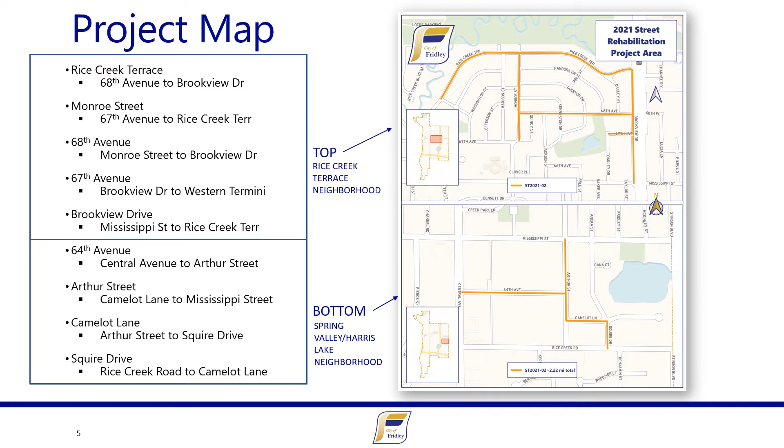The tentative schedule for the project includes this neighborhood informational virtual presentation, which you are watching now. After receiving comments and questions, we will bring a feasibility study and set an improvement hearing date for the December 21st council meeting.

We will then have the preliminary assessment hearing on January 25th, 2021. We will award the project to the contractor in February. We plan to begin construction in May or June of 2021, with completion by September of 2021, and then have our final assessment hearing in October of 2021.

The project is included in the comprehensive street plan. Council adopted the plan for maintaining the city streets and alley system. The city of Fridley has approximately 81 miles of local streets and alleys, and the city has spent $4.1 million in pavement rehabilitation over the last 5 years.

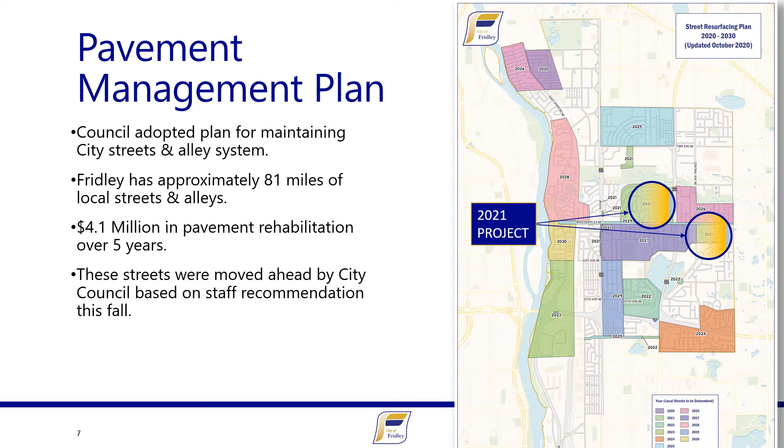The comprehensive street plan is created based on the street program analysis. When considering selecting a project, we look at the items below. For the 2021 street rehabilitation project, the streets selected for the project are in bold below.

The bolded items include the street condition and ranking, which we inspect yearly to figure out condition and ranking; the high maintenance levels, which we work closely with our Public Works Street Department to identify; need for utility replacements, where we work with Public Works utilities to figure out water main breaks and other utility replacements; and our available funding for the project. With this project, the city also received a petition from residents on Monroe Street in 2019 to do a project.

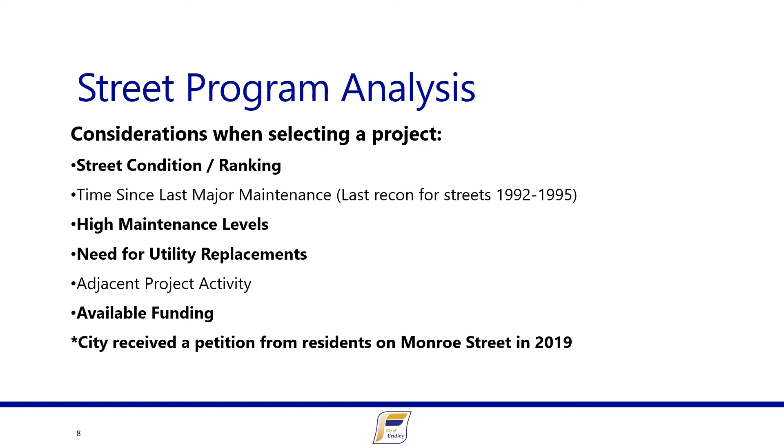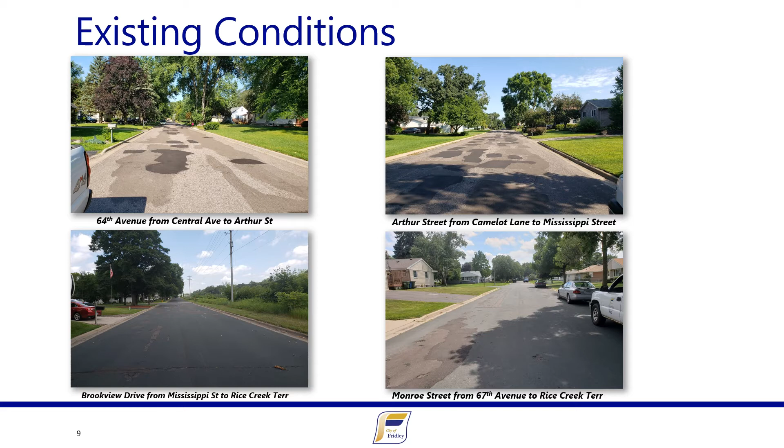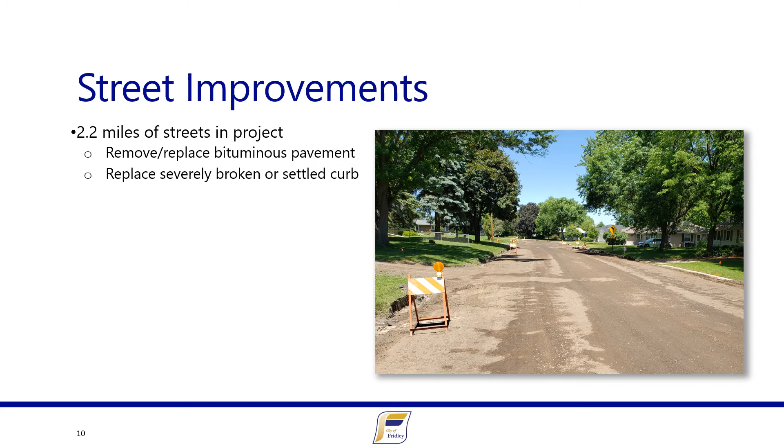Street improvements for the project include 2.2 miles of streets in the project area, where we will remove and replace the bituminous pavement, and we will also replace broken or settled curb along the project.

There will be utility work on the project, including water main replacement in select segments. These segments are all in the Rice Creek Terrace neighborhood, including Rice Creek Terrace between 68th Avenue and Madison Street, as well as Rice Creek Terrace between Oakley Street and Brookview Drive.

On Monroe Street, it will be near 68th Avenue to Washington Street, as well as a little piece on 68th Avenue near Monroe Street. And then on Brookview Drive in between 68th Avenue and Rice Creek Terrace.

The sanitary and storm sewer mains are in good condition, so we do not anticipate any sanitary or storm sewer work to be taking place on the project.

Staff will coordinate with the private utility companies to hopefully allow them, if they need any work to be done, to get it out before us, so that once we pave, they're not coming in later years to rip up the new pavement that is placed.

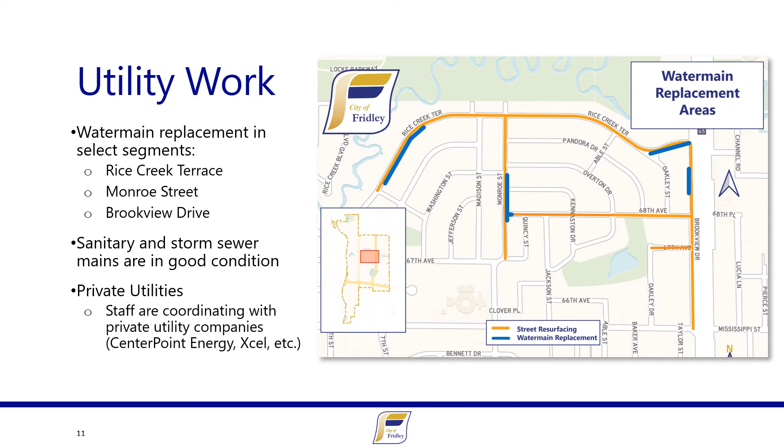Here is some construction information for the project. This includes access to your property. We will work with the contractor to allow access to your driveways during construction, except during major construction activities, which might include when they're working in front of your driveway.

On-street parking: we ask that you please do not park on the street during construction.

Temporary water shutoffs: the city water will require to be temporarily shut off during hydrant and valve replacements. This might require a shutoff for a few hours while they're doing the work. There might be temporary water. During water main replacement, areas will be placed on temporary water for a short period of time until the work is completed.

Project updates and notifications: residents will receive notification prior to significant work. This will include major project milestones, road closures, water shutoffs, utility repairs, and driveway coordination.

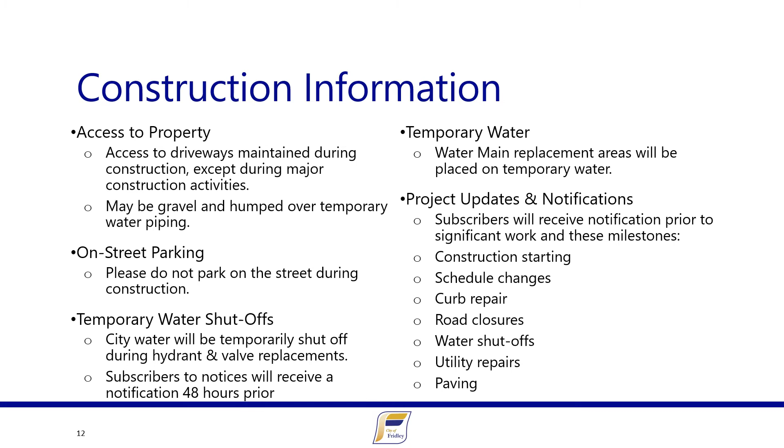Proposed special assessments are part of the project. We have two different types of special assessments. The first being low density residential, LDR. That includes those lots with 4 or fewer dwelling units. The assessment is based on per lot basis, and LDR units receive an equal assessment.

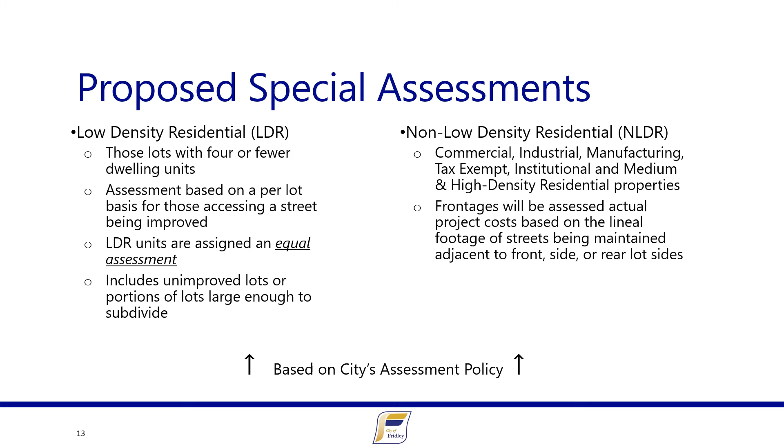The second being non-low density residential, NLDR, and these include commercial, industrial, manufacturing, tax exempt, institutional, and medium and high density residential lots. Frontages will be assessed actual project costs based on lineal footage of streets being maintained adjacent to front, side, or rear lot sides. For this project, all lots are part of the LDR special assessment.

Here is a map of the assessed properties on the right side. The parcels that are being assessed are in blue for the project. We have 229 properties that are going to be assessed under the low density residential. With our policy, the properties that are being assessed are the properties that have driveways connected to the streets that are being resurfaced. Assessments are based on actual construction costs.

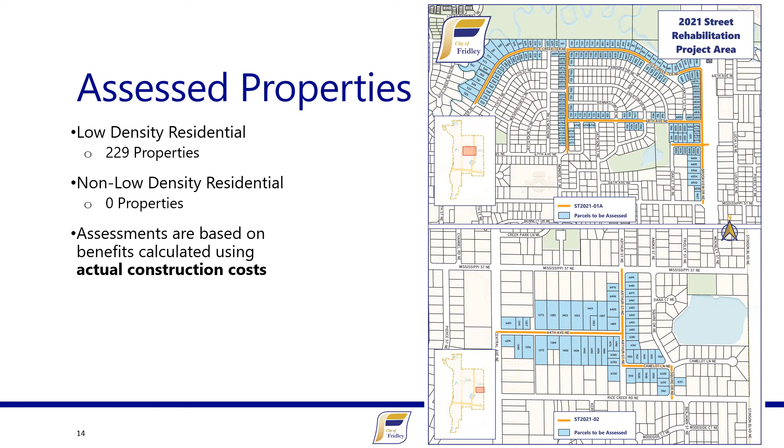Here's a look at the LDR property assessment history based off our recent projects that the city has done with special assessments. As you can see, the special assessments have a range between $2,000 to $2,800 for most of our reconstruction projects. We have a note there for the 2017-01 project with the $1,867.

That project was mainly a mill and overlay. The 2021 street rehabilitation project is mainly going to be a mill and overlay, so we'd anticipate that the special assessment will be somewhat in that range, if not lower.

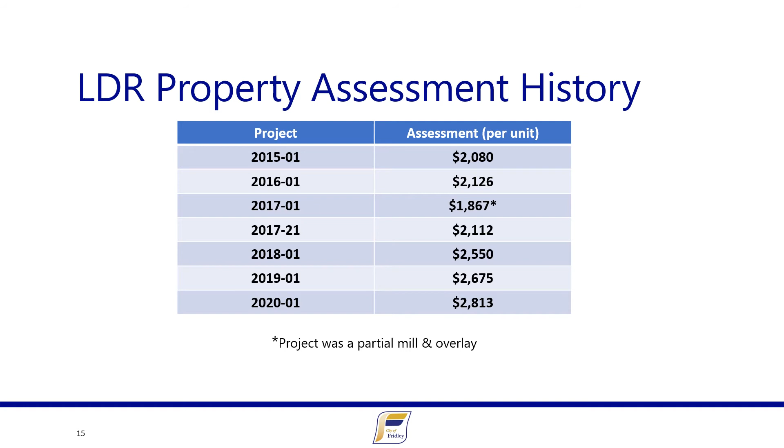Payment options for the special assessments include option 1: you can pay a lump sum payment within 30 days of the final assessment hearing, which would be in October, November of 2021.

Option 3 is senior citizens meeting certain criteria may request to have the assessment deferred until the future sale of the property. To qualify, you would need to be 65 or older, meet income level requirements, etc. And the interest does accrue until the property is sold.

What to expect during construction? The next few slides I'll have photos and discuss different aspects of the project.

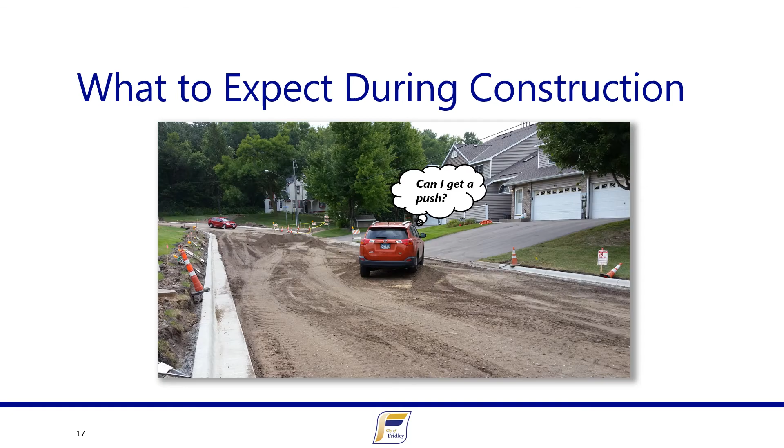The first item is temporary water. In the areas where we will be replacing water main, we will be putting those houses affected on temporary water to allow for the continuation of water into those houses while the water main is being worked on. You may see an above ground pipe connecting to each of the houses affected for the temporary water.

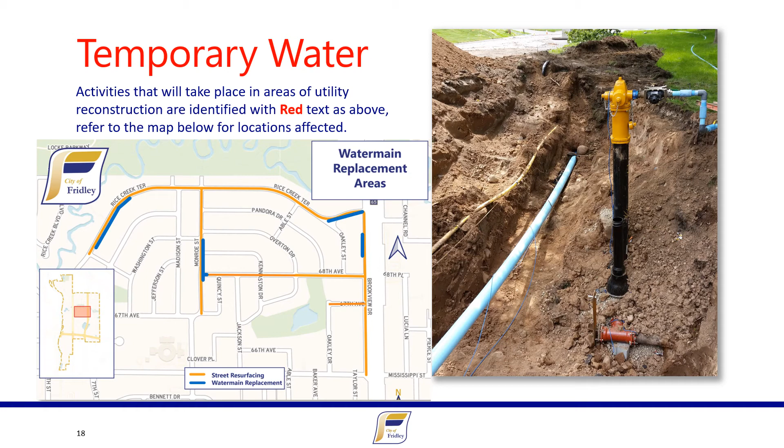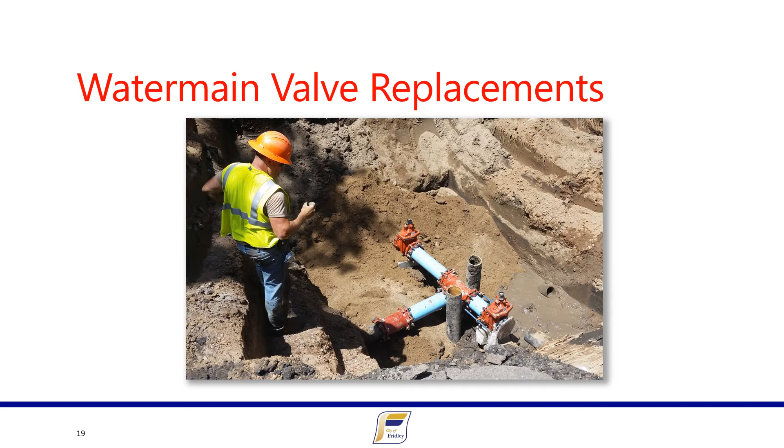You may see some of the water main valve replacements. These valves could be in the street or in the boulevard, in these areas where the water main replacements are going to be taking place.

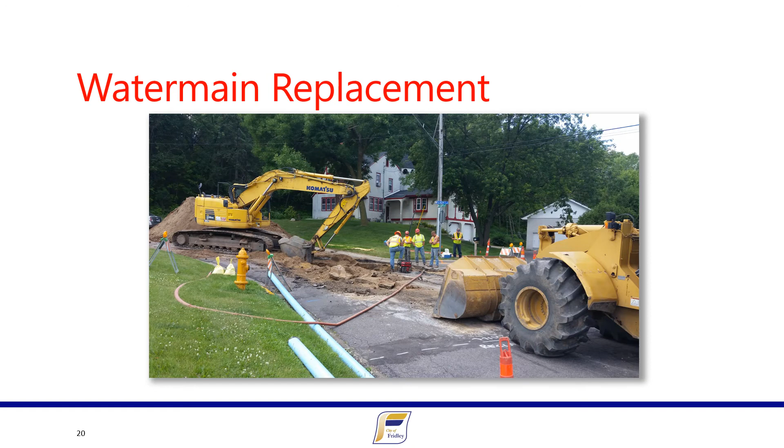For the water main replacement, the contractor will dig down to the location of the existing water main, generally 7 to 10 feet, and replace the old pipe with the new pipe in those areas that were shown on the map earlier for water main replacement.

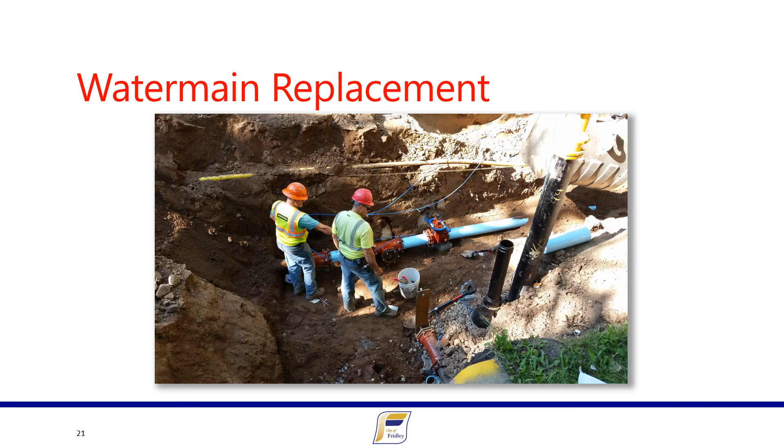Along with the water main replacement and the water main gate valves being replaced, we also might be replacing the fire hydrants in certain locations with the water main work.

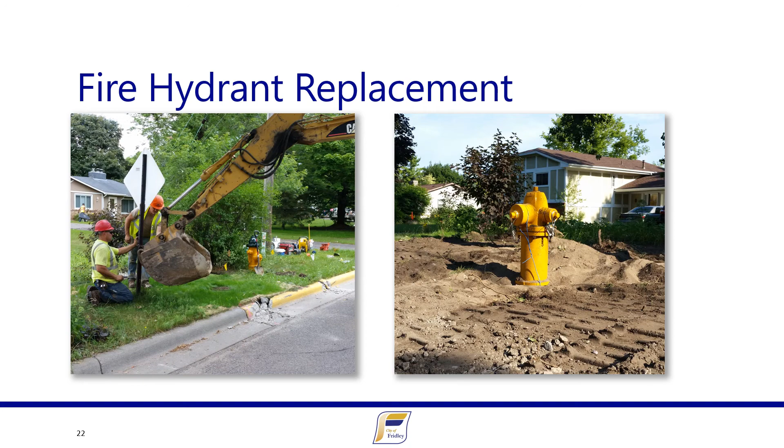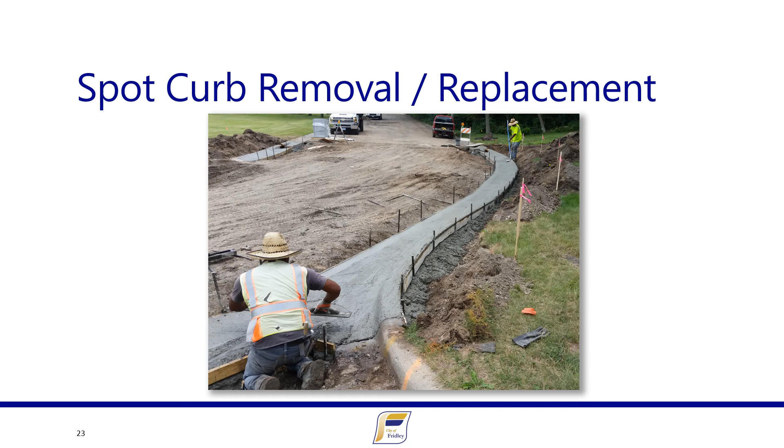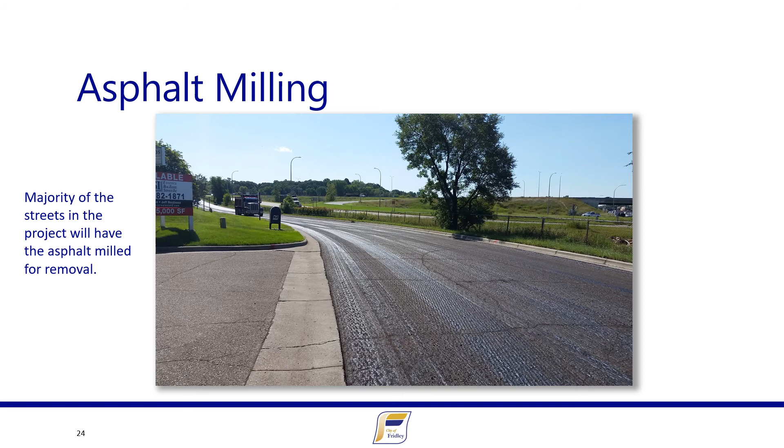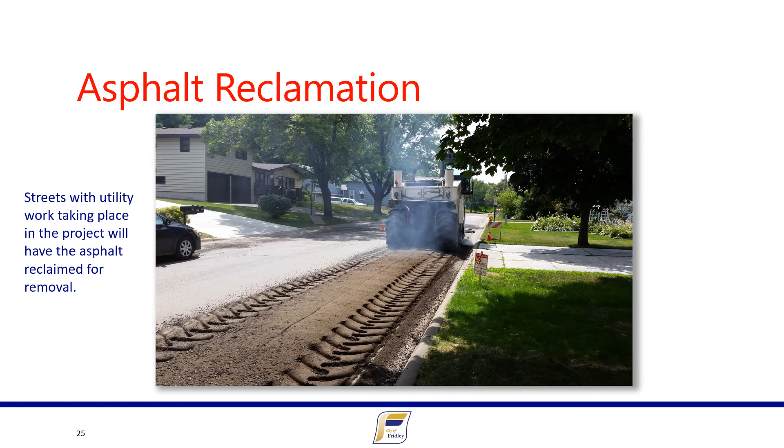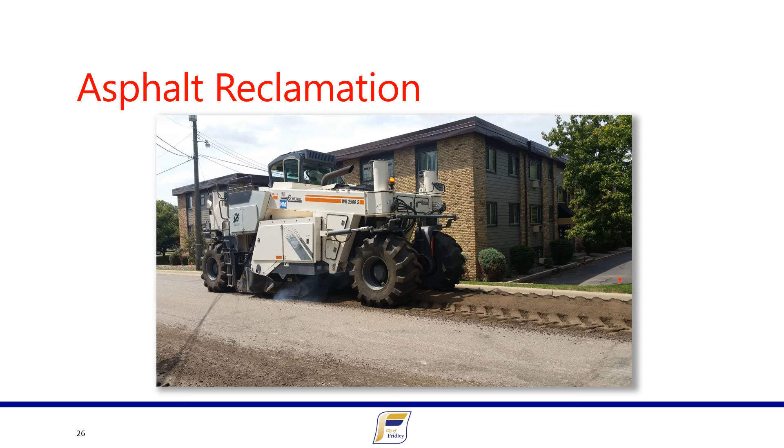Here is a photo of the asphalt reclaimer going through and doing the reclaiming process. Here's a photo after the reclaiming process is done. As you can see, the difference between the milled surface, as we saw in the previous slides, we will have a gravel road in the areas where the utility work is taking place.

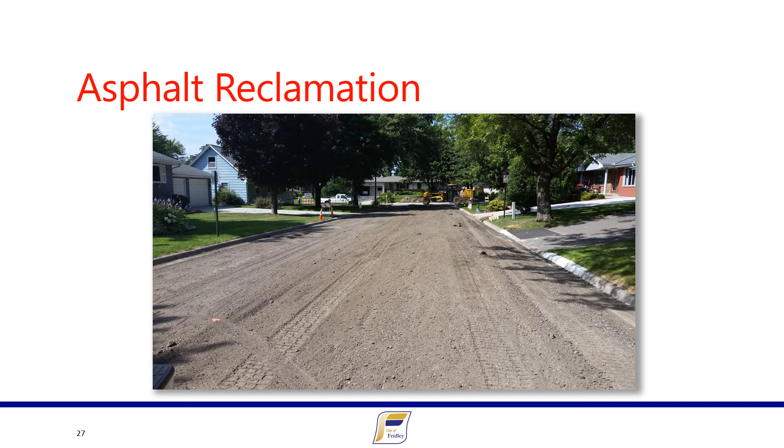After the reclaiming process is done, the contractor will come through and then grade out the aggregate base. The contractor will remove the excess reclaim off-site. Only the streets that are reclaimed will need the aggregate base graded.

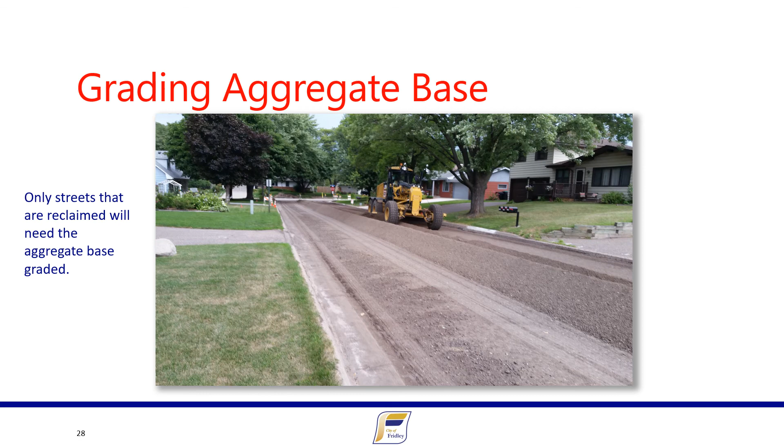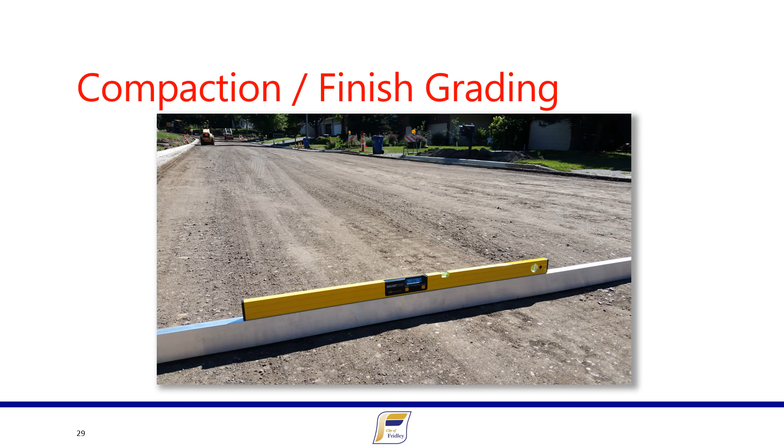After the contractor is done grading and the utility work is done, the contractor will then finish up with the grading and the compaction to get the base ready for the first lift of asphalt. On the reclaimed streets, after the utility work and the grading is done and we have the compaction needed on the base, the contractor will then come in and pave the base course, the first lift of asphalt.

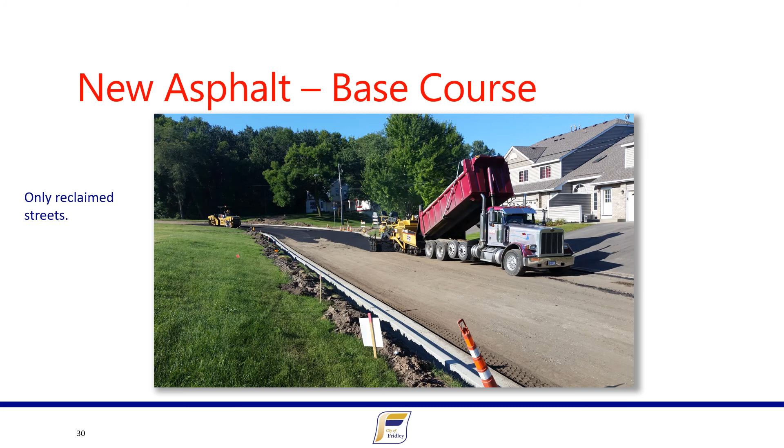After the utility work is completed and the first lift of asphalt is paved, the contractor will then begin on the boulevard restoration. Restoration will include all the areas that are disturbed during the construction in the project area.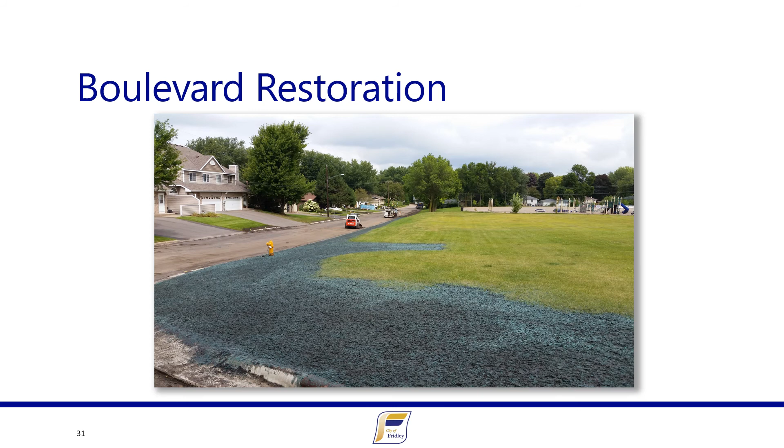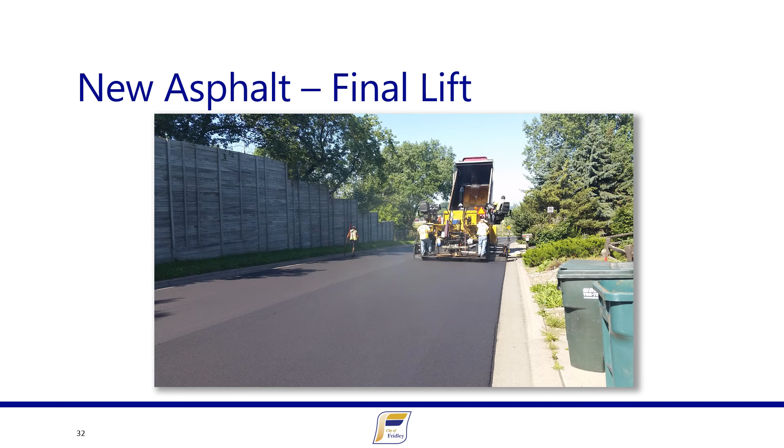After the restoration is completed, the contractor will then come in and pave the final lift of asphalt in both the milled section and in the reclaimed section.

After we put down the final layer of asphalt, we cut the street and fill in these cuts with an elastic rubber asphaltic agent. These cuts are made about every 40 feet and at manhole and gate valve locations.

With the freezing and thawing in Minnesota, things move and you end up with cracks across the street. Even on a brand new street with a new gravel base, the street will move and you will get a few cracks starting the first winter.

When we make these saw cuts, we tell the road where to crack on a nice clean line. Water is sealed from getting into the crack and causing further damage. It really adds to the life of the street.

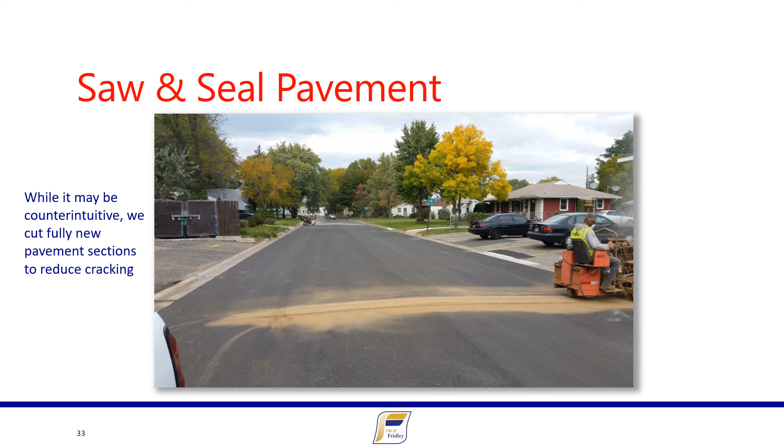The questionnaire helps us with the project. It asks about if you have a sprinkler system, invisible pet fence, if you have any plans for driveway or private utility repairs, if you have any water or sewer services issues, if you have a home business, if there's any dates of special events, family gatherings, graduations, etc. that we need to know about that could impact construction. Also if there's any existing utility or drainage issues, or if you have any special access needs.